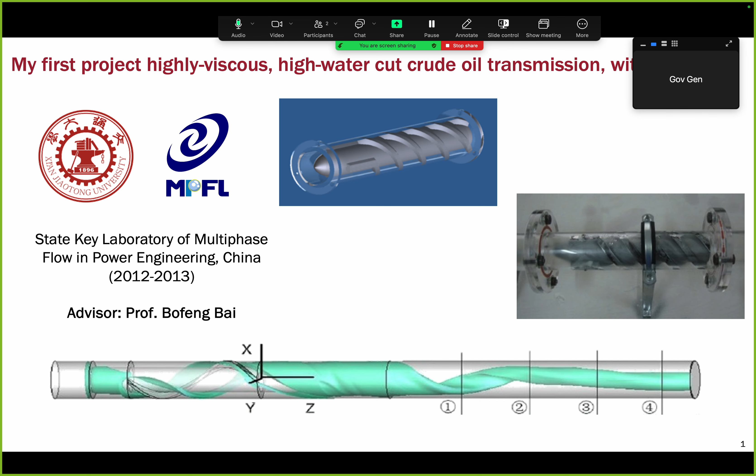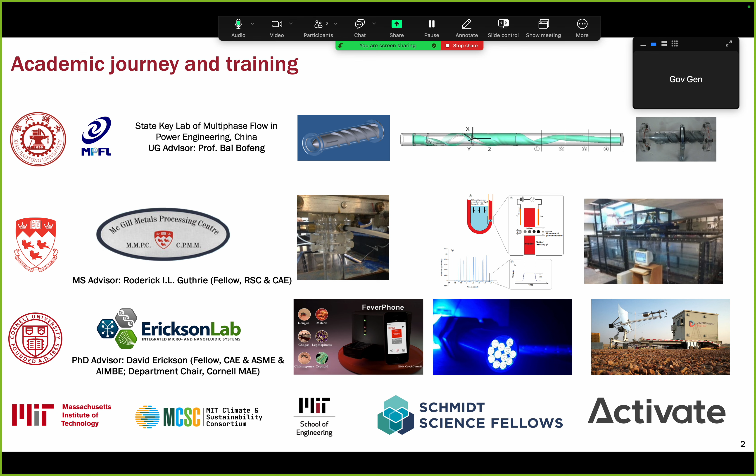So first of all, I got a huge, great opportunity to conduct my first project with Professor Bai during my undergrad study in China. That's over 10 years ago. Time flies. After that, I got the opportunity to get my master's degree from McGill University in materials engineering, and my PhD degree in mechanical engineering from Cornell University, and most recently at MIT as a Climate and Sustainability Consortium Fellow, then as a Schmidt Science Fellow, and most recently as an Activate fellow to focus on the entrepreneurship side of things.

If I were to use three keywords to define my background, the first one would be a multidisciplinary engineer, as shown from my multiple degrees from MIT, McGill, Cornell, and Xi'an Jiaotong University. I also have a huge focus on human dimension technology. When we design technologies in climate sustainability, recently I got a grant on climate justice to focus on how we can use the technology to benefit the communities, to maximize co-benefits. And I have shown multifaceted broader impact in my past record.

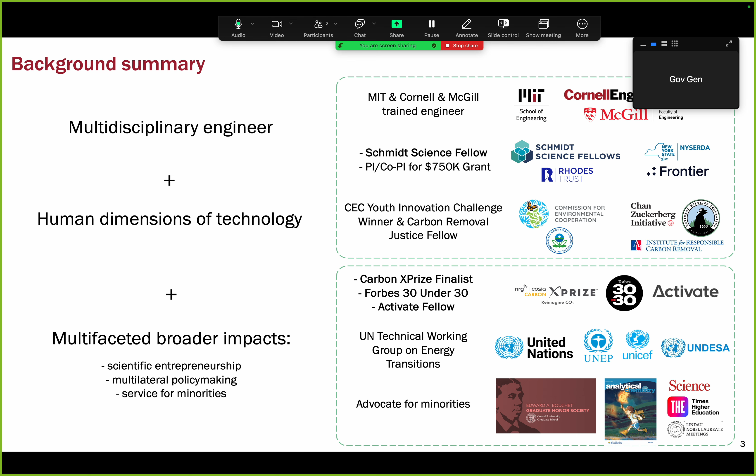That includes entrepreneurship, as shown in a Carbon XPrize finalist here, and also Forbes 30 Under 30 and Activate fellow. This is all related to entrepreneurship. I also got the opportunity to participate in policy making as one of the UN Technical Working Group members on energy transitions to co-author energy roadmaps. I also have a huge focus on service for minorities to build a better academia. So these are my recent two fellowships.

One is the Schmidt Science Fellowship, as one of the 29 fellows selected by Eric and Wendy Schmidt to focus on interdisciplinary science, and I was also one of the 46 fellows in the Activate fellowship program in the U.S. to focus on how we can translate learnings from the laboratory to the real world. One of the highlights is I got into the Forbes 30 Under 30 North America for my reactor engineering work for CO2 capture and conversion.

So firstly, I wanted to talk about the first work, which is solar-driven reactor engineering for CO2 conversion. I will focus on how to build the structure and also the surface components inside the reactor for this application. So firstly, let's just think about what is the scientific problem I try to solve.

So instead of thinking about CO2 conversion, let's first focus on, let's say, if you have an open pond and you want to maximize algae growth inside the pond. So in order for algae to grow, you need to have natural photosynthesis. And in order to have the maximized natural photosynthesis, you need to have the light and also the fluids, which is the CO2 in this case, to be delivered to all algae in the open pond system.

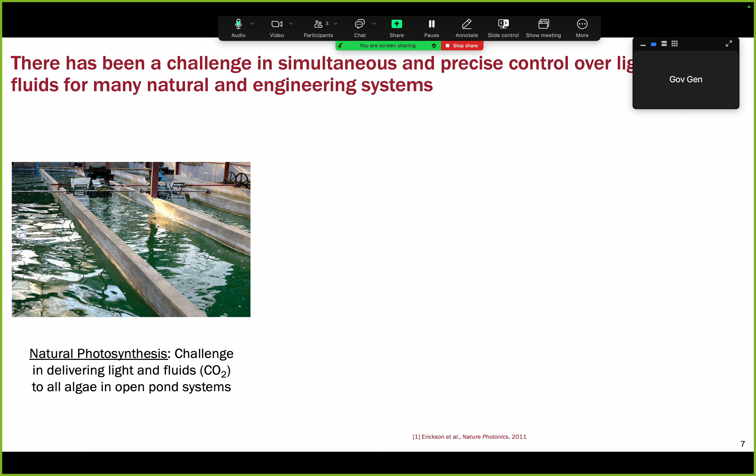So as you can see from the open pond analogy, there is a non-uniformity of light distribution. And also you can imagine the fluids, which is the CO2 distribution, is also non-uniform. And that will lead to a huge challenge in enabling the increase of the natural photosynthesis rate.

And similarly, if you think about many of the climate sustainability problems, let's use artificial photosynthesis as an example, where you put CO2 and other reactants into the reactor, and if the reaction is also driven by solar, there's a similar challenge in delivering the light and also the fluids, which is the reactant flow, to the desired location, similar to the algae. Here, instead of algae, it's actually the catalyst surface where the reaction happens.

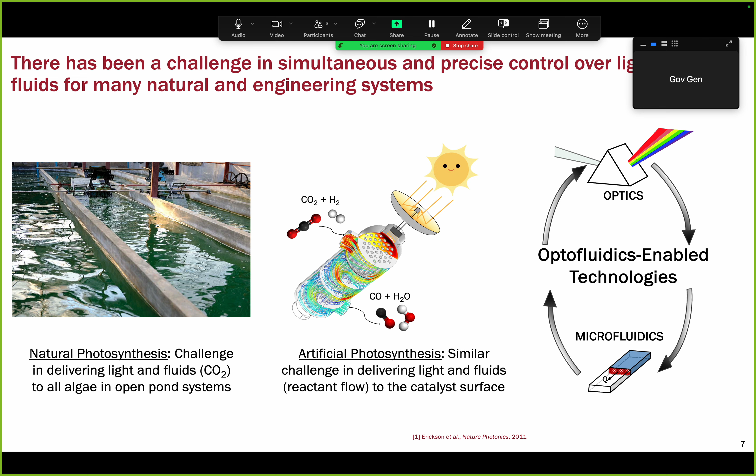So I ended up using a tool called optofluidics, which is a combination of optics and microfluidics, to enable concurrent delivery of light and fluids to the desired location with the catalyst surface. And so let's look at how photocatalysis is being done right now and what the problems are.

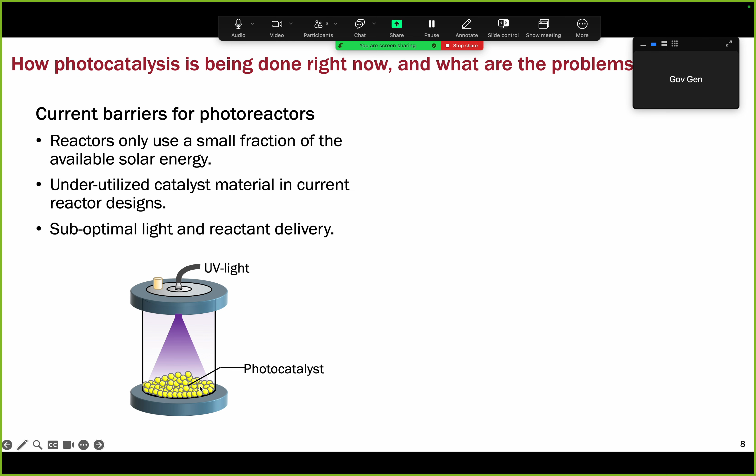If you remember the open pond analogy, if you look at the photoreactor system here, you have the UV light to provide irradiation for the catalyst materials, and the catalyst materials are packed in these different configurations. Whatever configuration they have, if you don't do any light guiding, you have a similar problem: the top surface of the catalyst will get overexposure of the UV light. And if you move further down, due to the shading effect of the catalyst material themselves, they don't get access to light. And without light irradiation, there's no reaction.

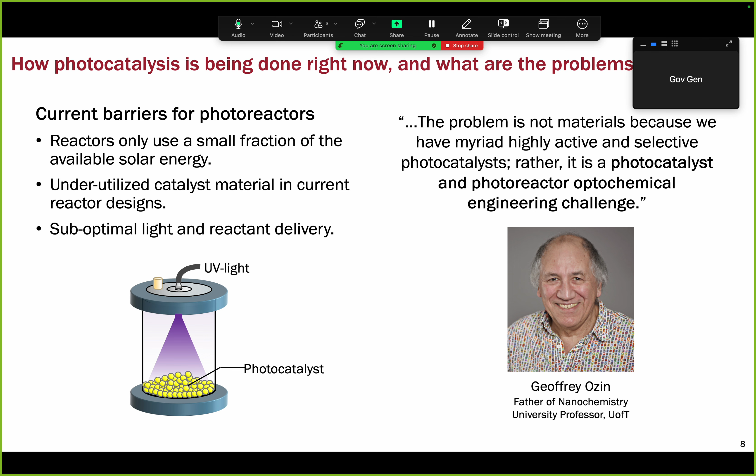So let me just quote a saying by Professor Geoff Ozin, who is widely considered the father of nanochemistry and also a university professor at the University of Toronto. To him, the problem for photocatalysis right now is not materials, because we have a lot of highly active and selective materials already out there. Rather, it's a photocatalyst and photoreactor optochemical engineering challenge.

And as I mentioned, I used a tool called optofluidics. Around 10 years ago, my PhD advisor, David Erickson, while he was doing a postdoc with Demetri Psaltis at Caltech, his original focus was microfluidics for point-of-care diagnostics, and later they figured out there's a way to use the same principle to enable not only point-of-care diagnostics efficiency, but also unlock new opportunities for energy applications.

In the specific example I'm going to talk about, I'm going to focus on photocatalysis, but I want to mention that as long as the reaction involves interaction of light, fluids, and sometimes also heat, there's a potential to apply this platform technology to design new reactor devices for innovations.

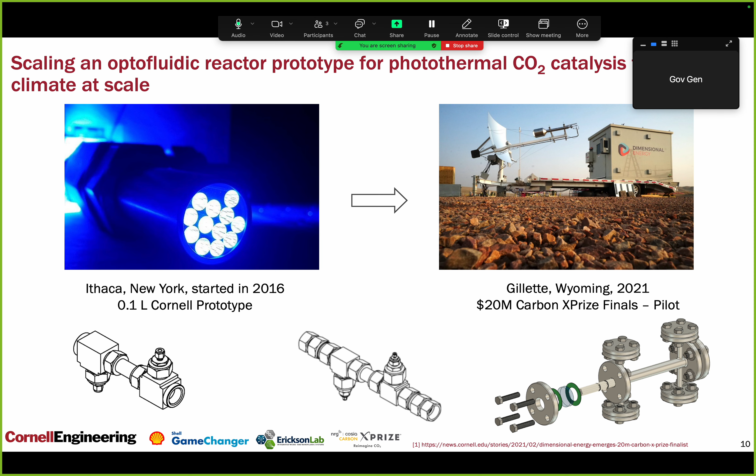And in that competition, only 10 teams were selected to enter the final level, and we focused on conversion of CO2 into different products, including fuels and feedstocks. There are also other teams who focused on CO2 conversion to plastics, nanotubes, polymers and other sustainable products.

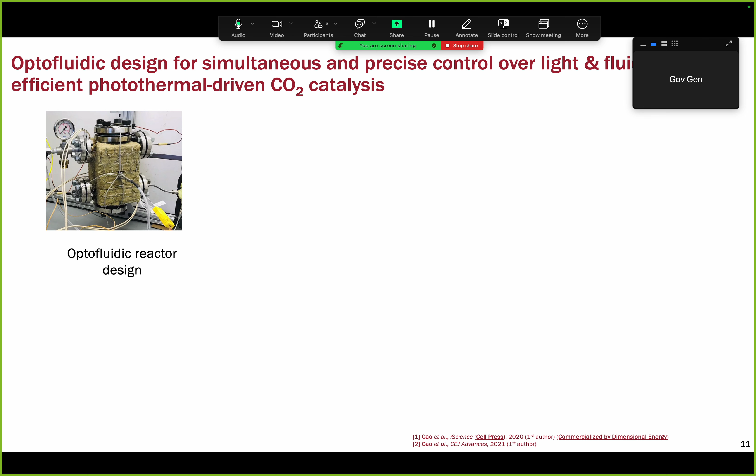So to give you an overview about what this design involves and how it is related to surface and structural engineering. So basically, this is the reactor design, and it consists of two components.

The first component is to do optical control. The goal here is that if you don't do optical control, and you look at the light shining from the side flange window, since there's no optical control, light experiences exponential decay. With a finite distance of light transmission, the light is gone, meaning the photon is gone.

That means the photocatalytic reaction cannot happen. The goal here is to see whether we can use waveguides, which are the rods shown here, to distribute the photons in a better configuration, so the total number of photons is still the same if you look at the area beneath both configurations.

It's just how we distribute the photons in a scalable configuration. At the same time, when you have the material and the photons, you also need to have the reactant delivered to the desired location. In this case, I borrowed the concept of a shell and tube heat exchanger, using the baffle design to deliver the reactants to the desired location.

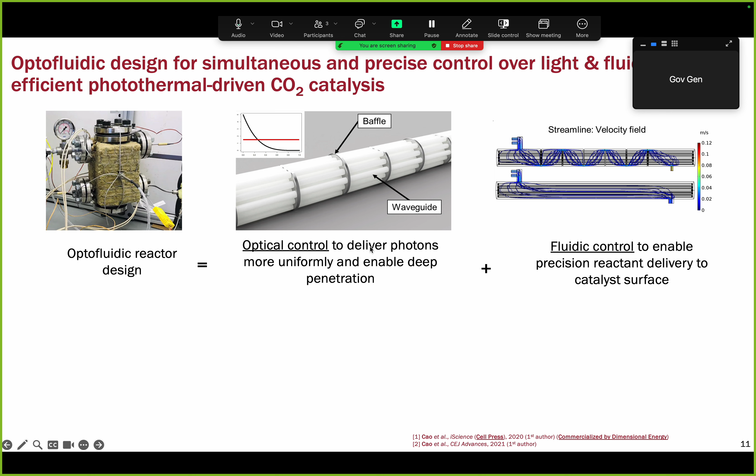This is just one of the early iterations of the technology, but the goal is to use optical control to deliver photons, and fluid control to enable precision delivery of the reactant to the catalyst surface.

What is inside these early reactor configurations is that if you shine light from the side, there are optical waveguides inside the reactor to make sure optical control and fluid control can be achieved simultaneously. In order to showcase the performance of the reactor, we want to use established reactions to prove the performance and compare with the state of the art.

Remember, this reactor is a platform technology. The reason we choose CO2 plus hydrogen to form carbon monoxide and water, the reverse water gas shift reaction, is because we want to compare with the literature. But having said that, the reactor can also work for other photo-driven processes, such as ammonia production and water splitting.

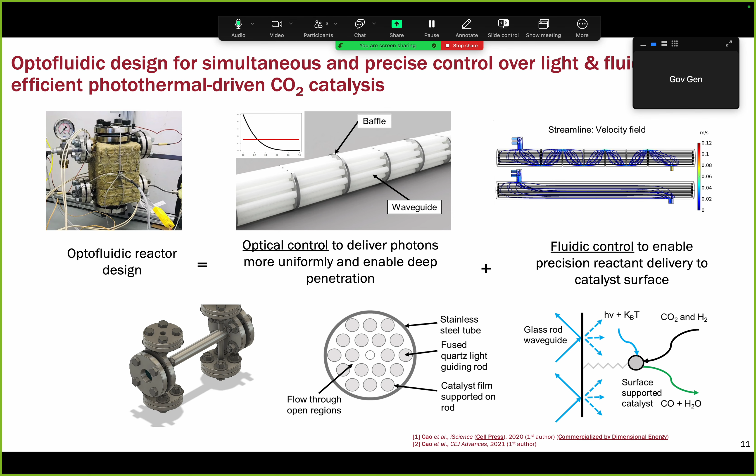So about the waveguide optical control, firstly we want to understand how to change the surface morphology. The key parameter we are looking at here is the attenuation coefficient, meaning how fast, how rapidly the photon intensity will decrease over the transmission line.

There are a couple of methods to change the surface morphology and surface properties that lead to a change in attenuation coefficient, either by physical method or by chemical method. The method I present here is based on just chemical etching, pretty straightforward. Firstly, you want to understand how the attenuation coefficient changes versus the etching time.

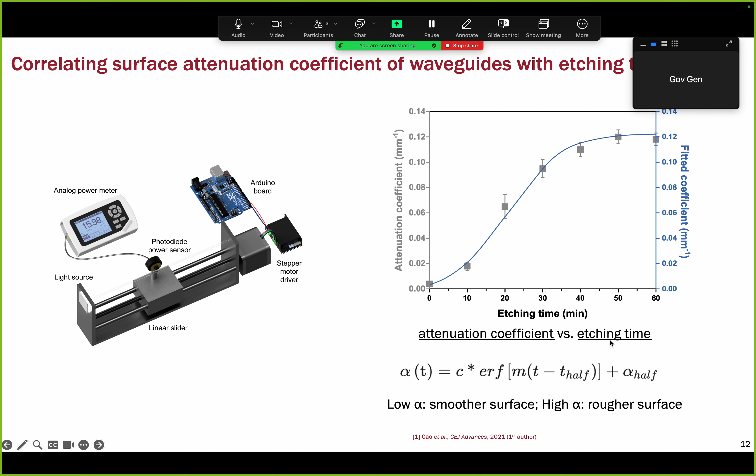Then we want to understand, in order to achieve a more or less uniform distribution of the photons, what is the relationship between attenuation coefficient and distance at different locations of the waveguides, so we understand for each distance and location what surface property we want to apply.

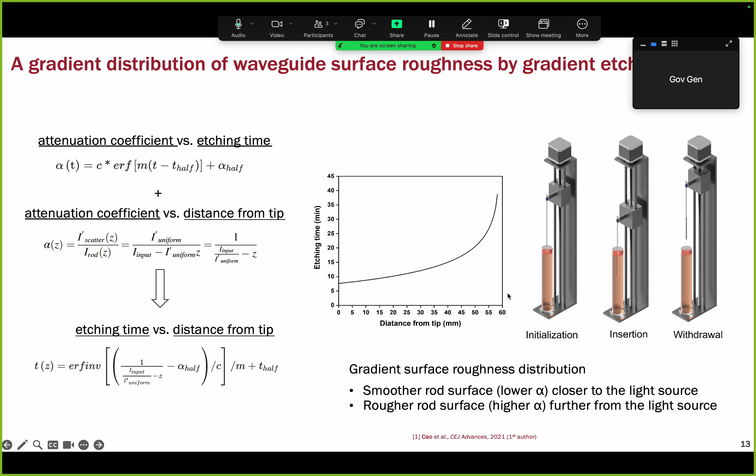There are several methods to achieve this, either by creating cracks using physical methods, or by a variety of chemical processes such as etching at controlled rates at different locations of the waveguides. If you recall the example I illustrated earlier, the previous distribution was the gradient decay of the photon intensity.

After the gradient etch method of the waveguides, we achieved a more or less uniform distribution of the photons along a longer, scalable configuration along a line of distribution.

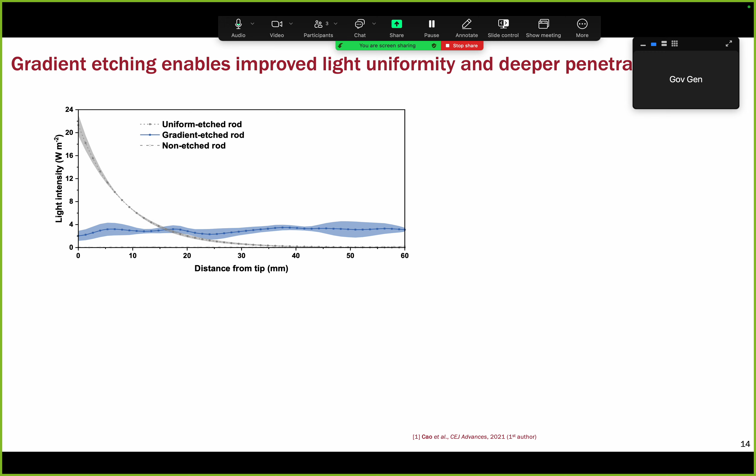The principle behind this is that if you look at the surface property, instead of having a very uniform surface that leads to exponential decay, we applied a gradient distribution of the surface roughness, so that further away from the light transmission, the photons emitted are still more or less similar in intensity.

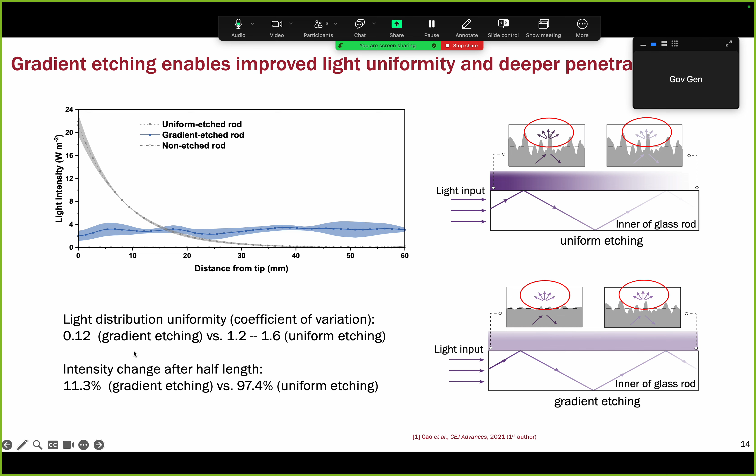And if you look at numbers, which is the coefficient of variation, an indicator of light distribution uniformity, after our gradient etching, we achieved much better uniformity of light distribution.

Regarding fluid control, there are microfluidic methods to achieve this, but we also want to scale up this technology for field deployment. So we ended up using different configurations of baffles to study the influence on the fluid field. What is shown here is a couple of the helical baffles. We also studied different plate baffles, the opening number, and spacing, to see how that affects fluid delivery.

At the same time, we use multiphysics modeling to analyze and optimize the design and operating parameters so that we had maximized fluid flow, heat transfer, and reaction yield at the same time.

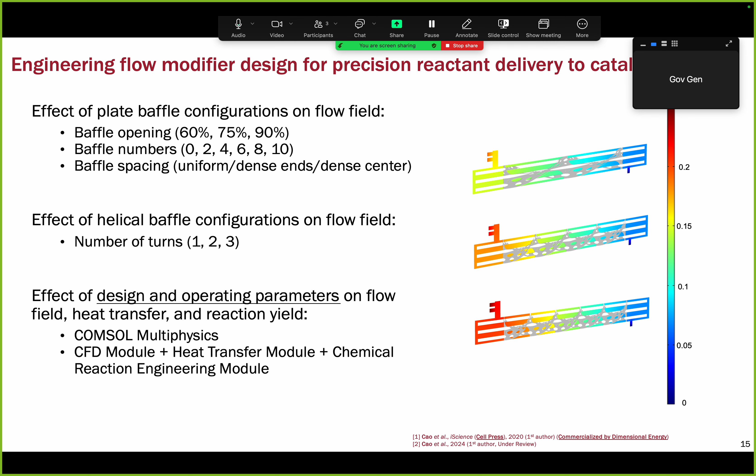So let's look at the reactor. This is one of the early lab prototypes that we tested in laboratory conditions. We wanted to compare it with the literature, so we used the exact same material and operating conditions, like flow rates, operating temperature, pressure, light source, and intensity, to keep everything consistent so we could be fair in our comparison.

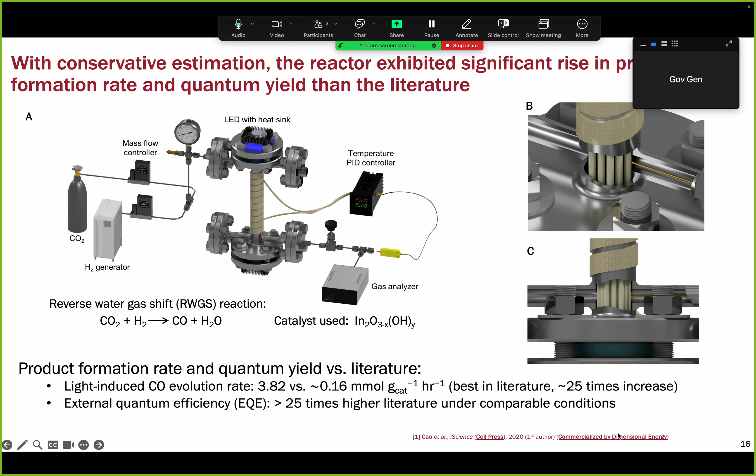What is more exciting is that beyond the early lab scale prototype, we also tested the potential for diameter scale-up so we could have higher throughput for the reactor. At the same time, you wouldn't want to scale up a reactor to 100 or 1,000 liters forever. This is the middle point we reached: we came up with a volume and throughput we were comfortable working with, and then we put reactors operating in parallel and tested them.

So the goal here is to increase the throughput without just building a crazy big reactor.

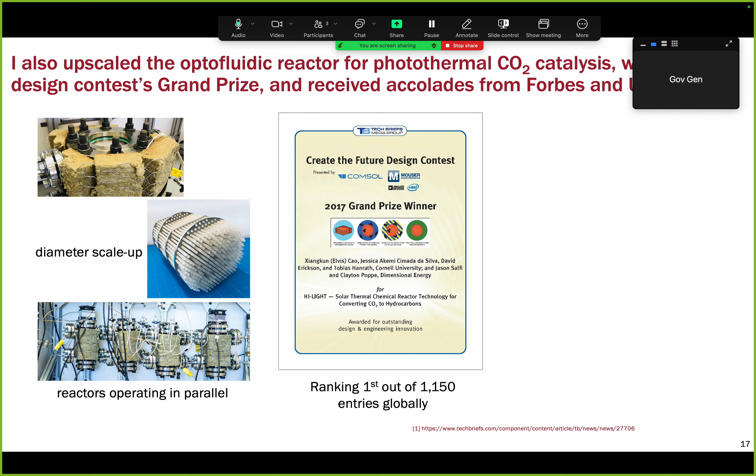Because of the design of the surface of the waveguides and also the reactor components inside this specific reactor, in 2017 this design, which I led, achieved one of the top spots out of over 1,000 entries — we won the grand prize. We were the grand prize winner internationally, and I also received several other recognitions because of the implications of this work.

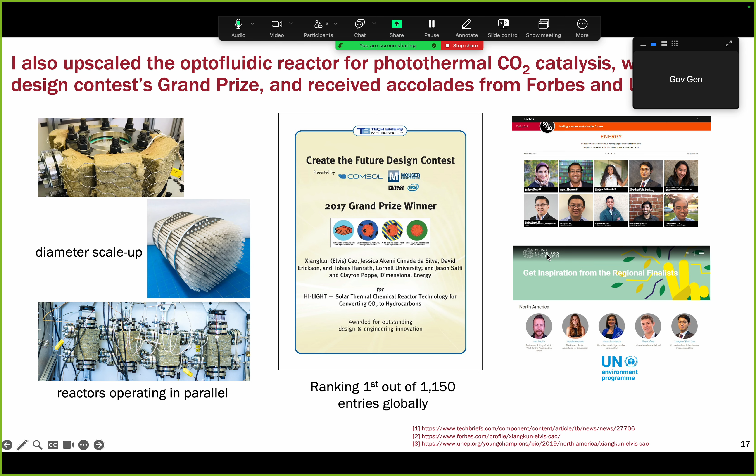What is more exciting is this pilot project we tested in Wyoming. Because this is a competition, all the efficiency and conversion rates needed to be verified by a third party. In this specific application in the Wyoming pilot, the only energy input into the system was solar, and it was being tested next to a coal-burning power plant. The third-party verified efficiency of CO2-to-syngas conversion, syngas being a mixture of hydrogen and carbon monoxide, was over 50% over a couple of weeks during the competition.

So that's what is more exciting beyond just the lab prototype.

And also because of the performance in this pilot project, most recently, about 2 years ago, there was a United Airlines contract to purchase 300 million gallons of sustainable aviation fuels over the next 20 years.

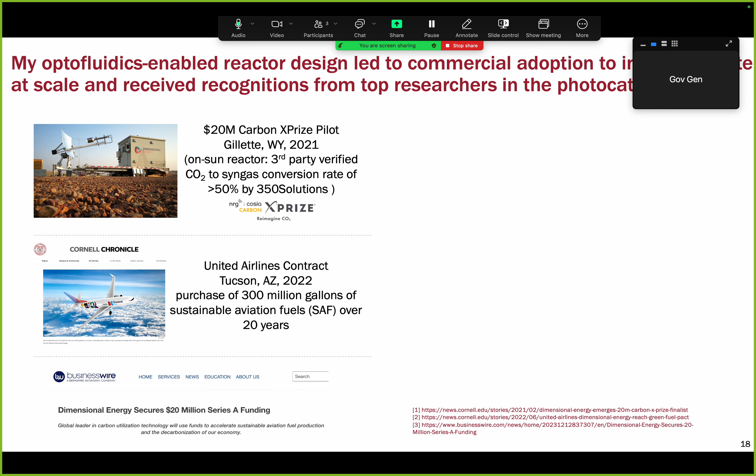In the first step, you can make syngas, which is hydrogen and carbon monoxide, from CO2. Later, using syngas as the input, there's a Fischer-Tropsch process, well established in industry, that converts syngas into longer chain hydrocarbons, which can potentially be used to produce aviation fuels. Also, just in 2023, there was a 20 million dollar Series A raised for this spin-off company from my PhD effort, which is pretty exciting.

But I think what is more exciting is the recognition, especially from one of the few experts, Professor Ozin, who says these compartmentalized, self-contained, and modular units can potentially make CO2 catalysis see the light of day.

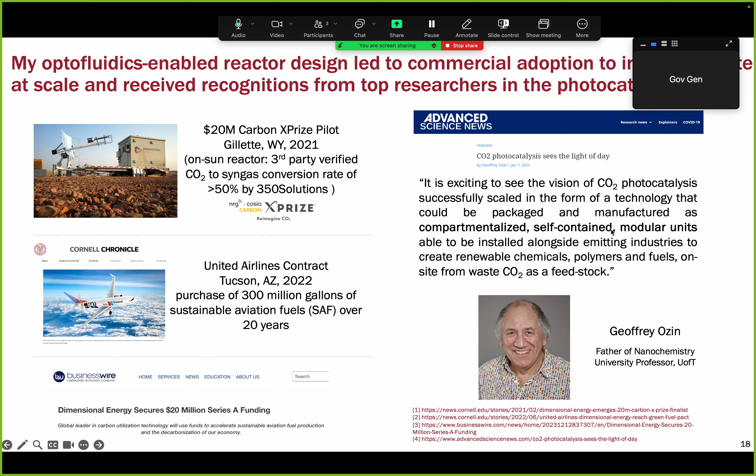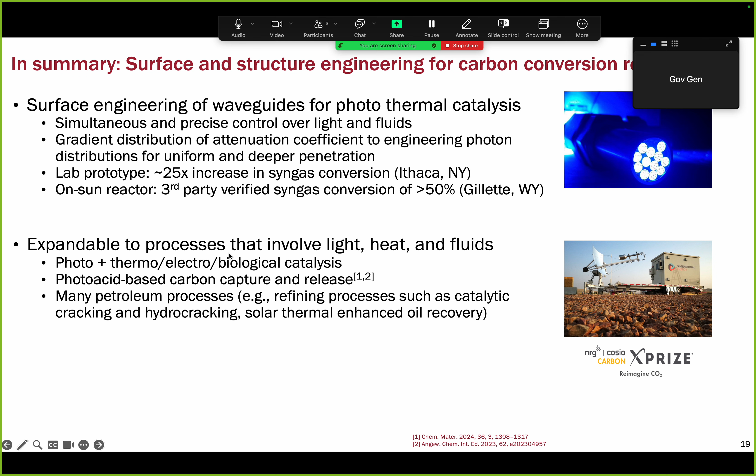So I've spent a lot of time discussing this project, and the key takeaway here is that by doing surface engineering of the waveguides and also structural engineering, you can achieve simultaneous and precision control of light and fluids, leading to enhanced reaction rate. This is also potentially expandable to other processes that involve the interaction of light, heat, and fluids.

So this is about the first project. Now I wanted to talk briefly about a second project, which still uses surface and structure engineering, but for a different application, which is for particulate matter, PM, capture.

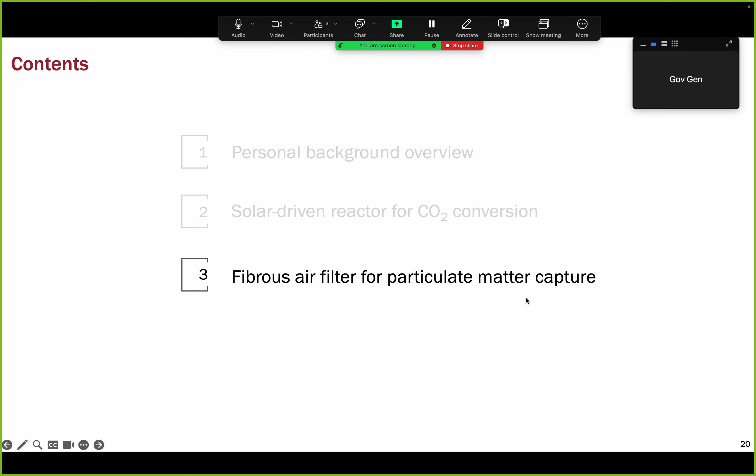The rationale for doing this is that right now we spend around 80% of our lives in an indoor setting, so indoor pollution control has gained significance and immediacy. For larger size particulate matter, such as 100 micrometers in diameter, it takes around 4 to 9 hours to float and reach the ground. But for 1 micrometer in diameter particulate matter, it takes much longer, 19 to 98 days. That means there's a huge danger compared to larger size.

So for very fine size, micrometer size PM, especially below 1 micrometer, there's a lot of challenge and also a lot of need to remove that.

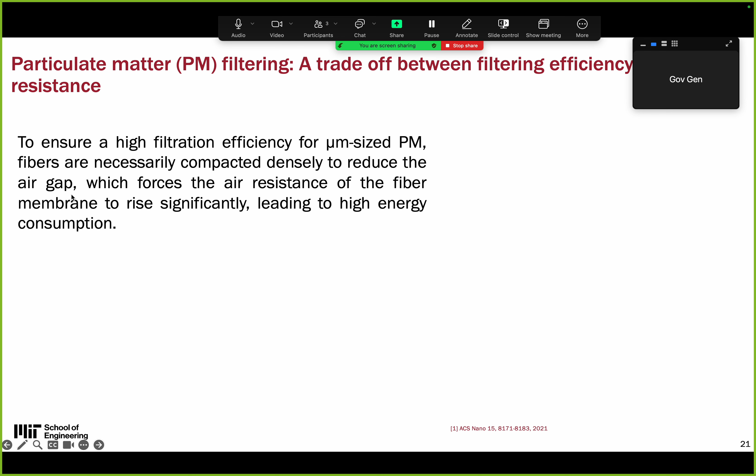Currently, when we think about using fiber membranes, which is an established method, there's oftentimes a trade-off between efficiency and resistance. Because in order to make sure you have very high efficiency, sometimes you have to compact the fibers really densely to reduce the gap. But at the same time, if you do that, it forces the air resistance to increase significantly. This is the trade-off we are facing.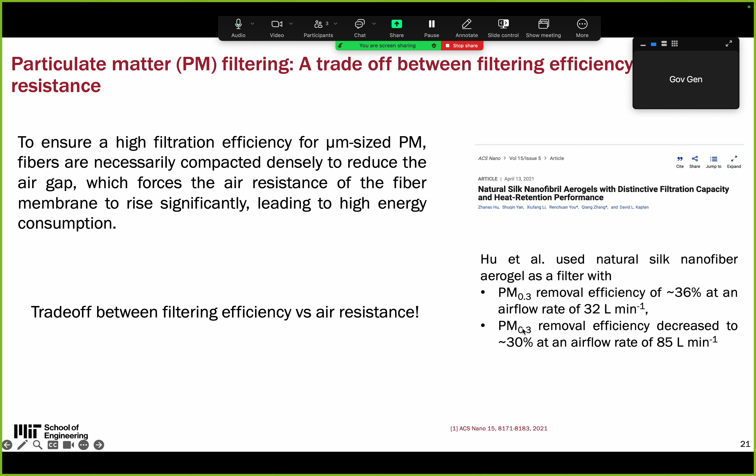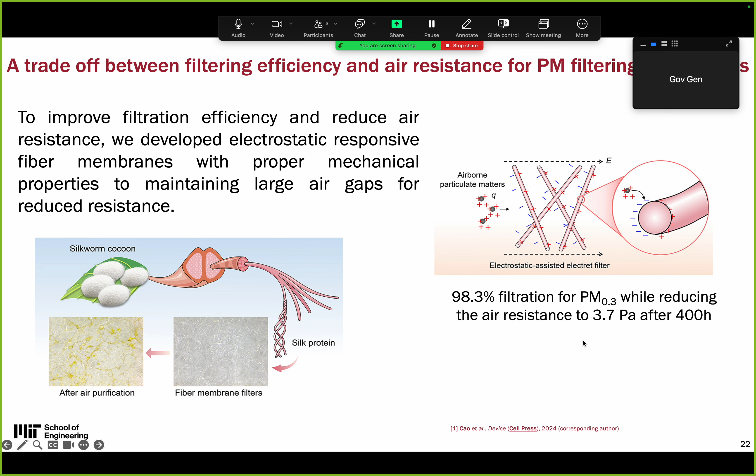The key summary of this work is that I designed an electrostatic responsive fiber membrane so that I achieve a very high filtration efficiency, around 98%, at the same time with reduced air resistance. This was done by surface modification to the membranes.

So this is the membrane we're talking about here. There are two takeaways I want to mention. Firstly, we end up using silk nanofiber to do the modification for the surfaces of the membrane. Secondly, the rationale for doing that is that there are two components inside silk nanofiber.

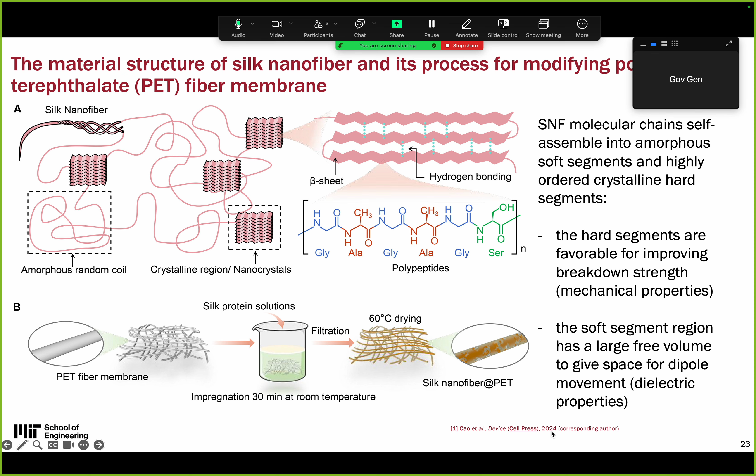There's the hard component, which you can use to improve the mechanical property that we care about. At the same time, there's a soft segment which provides a huge free volume so that we can enhance the dielectric property at the same time. So by utilizing the silk nanofiber modification for the surface of the membrane, we achieve both enhanced mechanical property and enhanced dielectric property. This work was recently published on Device of Cell Press.

If you look at the mechanical property enhancement, let's look at figure D here, which shows the stress-strain correlation. As you see here, without any modification, at 0%, a very small amount of stress can cause the strain to increase by more than 40%, which is not good.

Also, if you look at figure E here, which shows the compression strength and modulus curves, the key takeaway is that there's an optimal concentration we want to modify to change the surface property.

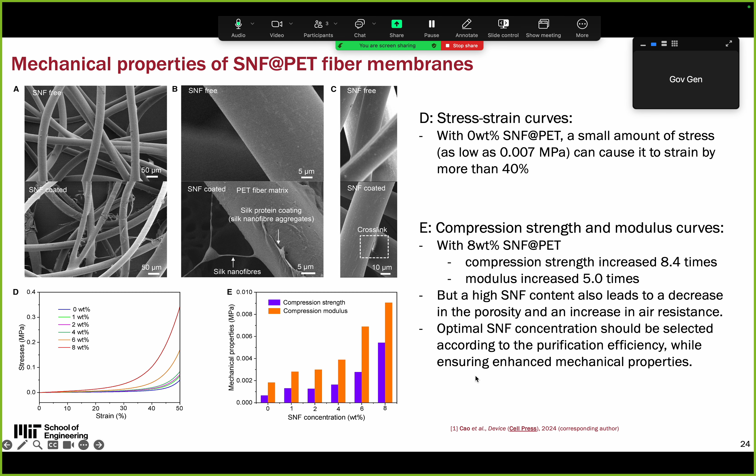I wanted to quickly compare two data points, at 0%, which is no modification, and 2%, which is 2% modification by doping nanofiber by silk into the membrane surface. If you compare the direct filtration, it's 0 and around 1.3% for 0% no modification, and when you move to 2% modification, there's about 9% efficiency.

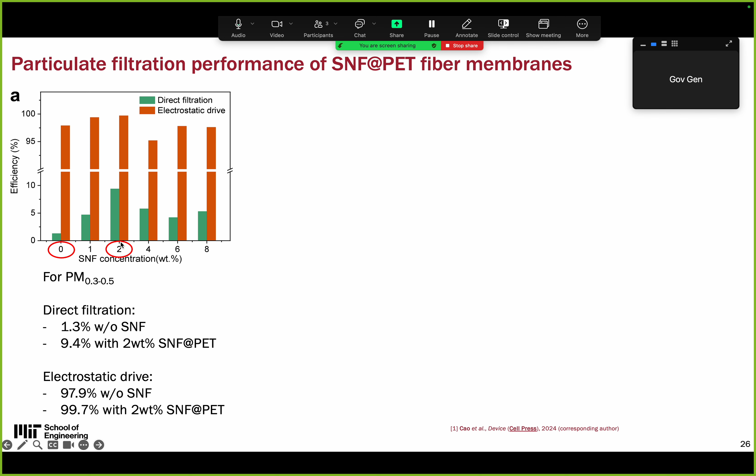If you change that from direct filtration to electrostatic drive, the efficiency for both of these has a huge increase. For the 2% doping compared to other percentages, we achieved around 99.7% filtration efficiency.

Here is the figure to show the optimal air resistance for the different doping levels. By combining the efficiency and air resistance, which is our optimization goal, we define a quality factor, so that if you have a high quality factor, that means you have very low air resistance and very high filtration efficiency.

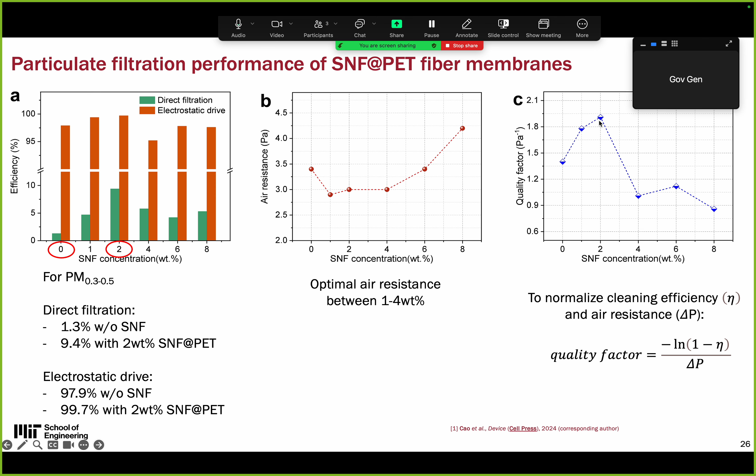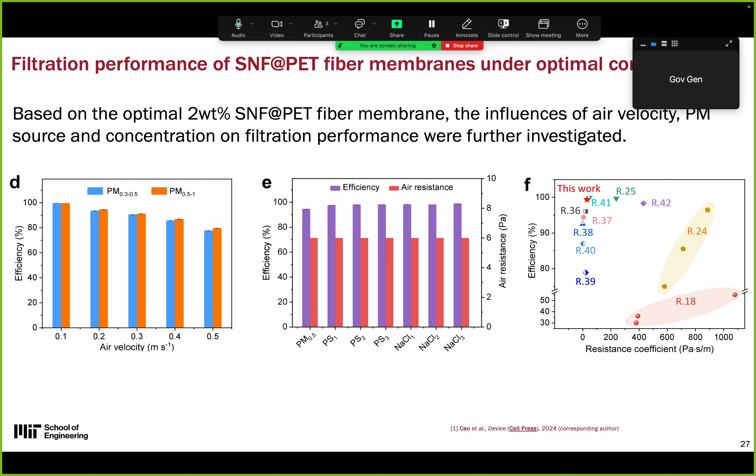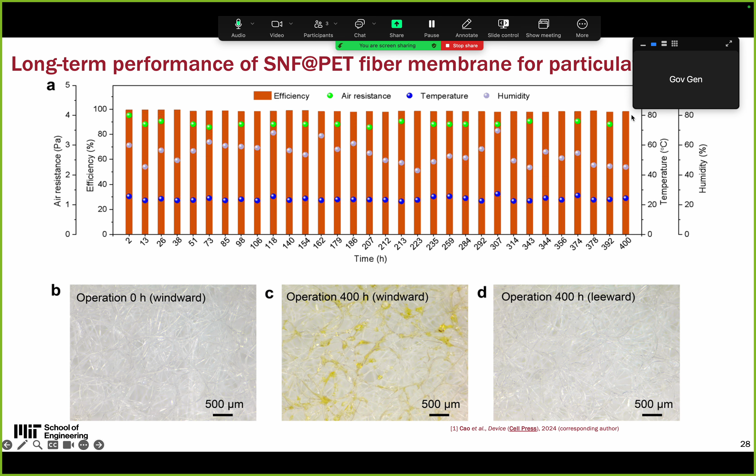And for all of the doping efficiency here, we see 2% is the optimal level. Again, this is to show the long-term performance and the effect of the air velocity and concentration on the filtration efficiency. And here is to show, after 400 hours operation, it still maintains a pretty constant level of efficiency of the removal.

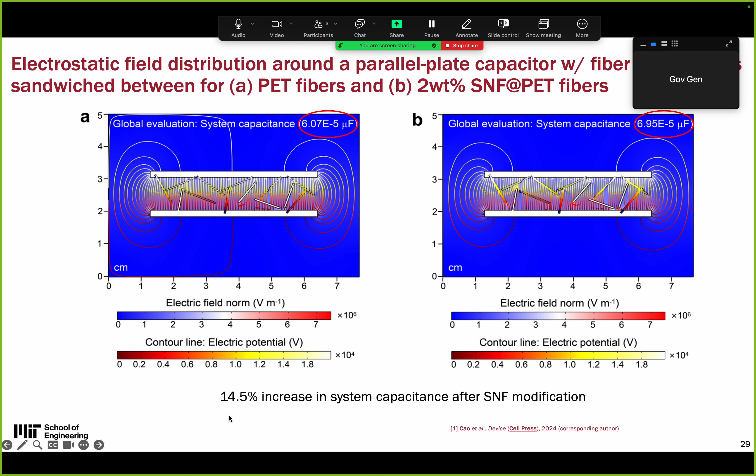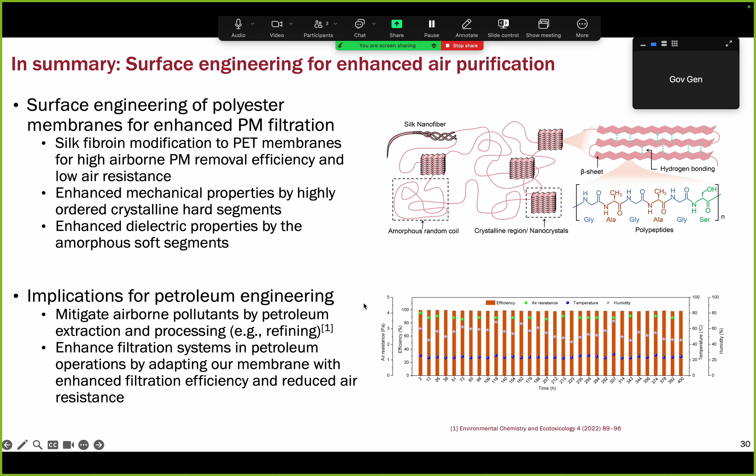And this is the principle and rationale behind it. We do COMSOL modeling to compare both of the configurations, and we see after modification there is around 14.5% increase in system capacitance. That leads to the increased efficiency. And finally, this is a quick summary of this work. And the principle here has a lot of implications for other fields, for example, petroleum engineering.

And in my talk, I talk about the surface structure engineering to lead to efficient devices for carbon management and particulate matter removal. But these are just one of the few examples that we can potentially leverage surface structure engineering principles to lead to efficient devices that can work in the field.